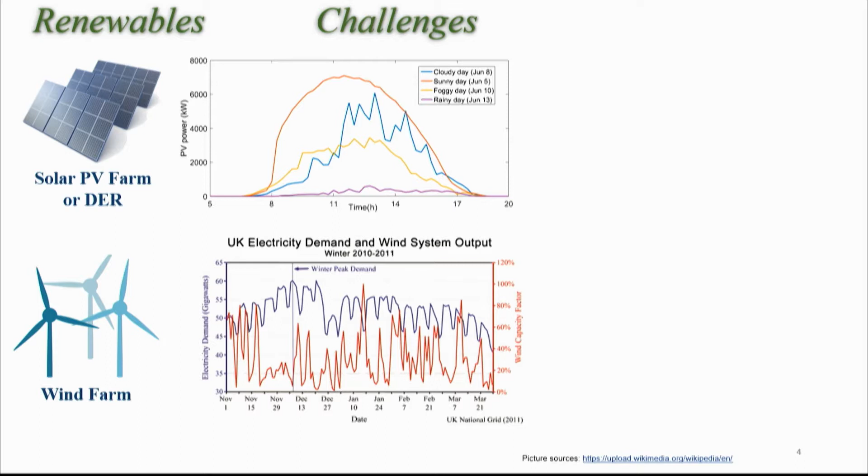So obviously we need a storage system, like a battery, to shift the energy from when it's available, more than what we need, to where we need it.

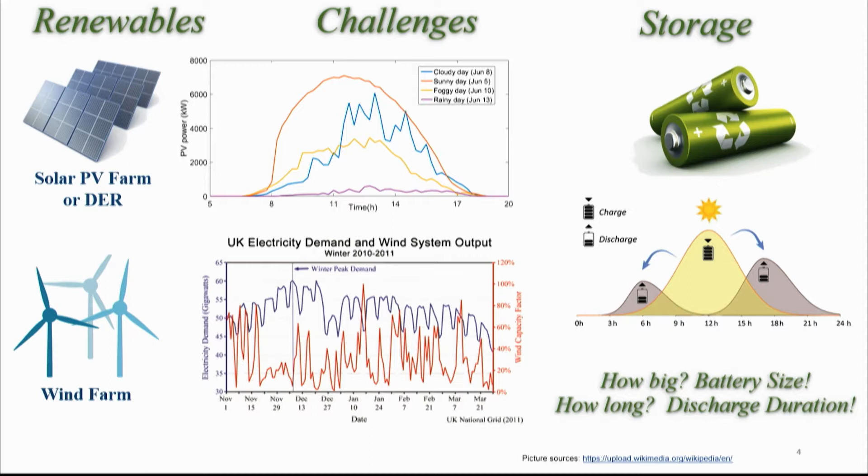But the question is, we are talking about economy and economy of scale, so how big should those batteries be? The size of the batteries, the cost of the batteries, and how long we can keep the energy in the batteries - we call it the discharge duration. Batteries can do the job up to a certain percentage of penetration into the existing energy systems. After that, you'll pay much more cost for every 1% increase than probably the first 50%.

Now, we have hydrogen, which is the most abundant element in the universe. We are made of carbon and hydrogen, almost everything. The problem is we cannot find it in a pure form on Earth. So we need to put some energy to produce the hydrogen, and that means hydrogen is an energy carrier, not an energy source. So we put some energy in, and we store it in that hydrogen. Hydrogen is just a very simple and light element - one electron, one proton, colorless, odorless, but very flammable gas. The atomic weight is around 1.008.

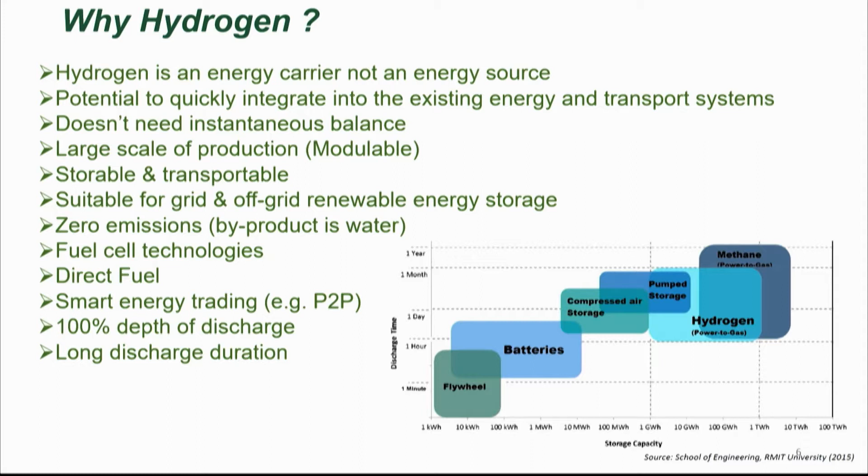And if we compare that to the flywheels or the batteries, compressed air, even pumped storage, hydrogen can go much bigger and can last for longer, so longer discharge duration. And you can also discharge to 100% depth of discharge, not like the batteries, where you cannot consume what's in there. And one more important thing is, batteries, when they are full, you cannot do much. But with hydrogen, you can store that hydrogen or convert it to another form of energy storage, like convert that to ammonia, or you just add tanks and store it. We'll talk about this later on. So that's why we are heading towards hydrogen.

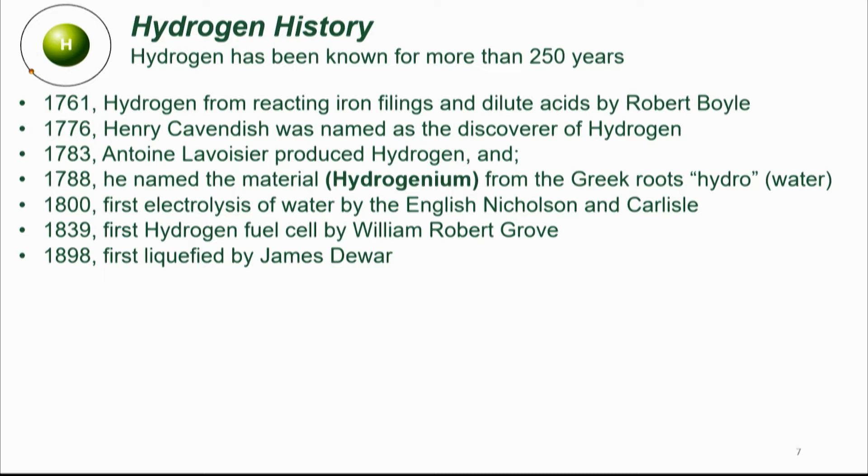Just to give you a quick idea, hydrogen has been well known for the last 250 years. The first time was 1761, though like 15 years later, someone else, Henry Cavendish, was named the discoverer of hydrogen, 15 years after the first one, Robert Boyle. Then hydrogen started gaining potential, and they began producing hydrogen after that. The first time hydrogen was named, given the name hydrogenium from the Greek root hydro, was in 1788. A few years later, the first water electrolysis was tested, and about 40 years later, the first fuel cell was actually built and tested. Then another 40 or 50 years, hydrogen was liquefied for the first time, and just about in the 1900s, that was the first time they used hydrogen in big balloons. And between 1920 and 1930, there were a lot of airships crossing the Atlantic carrying passengers, filled with hydrogen.

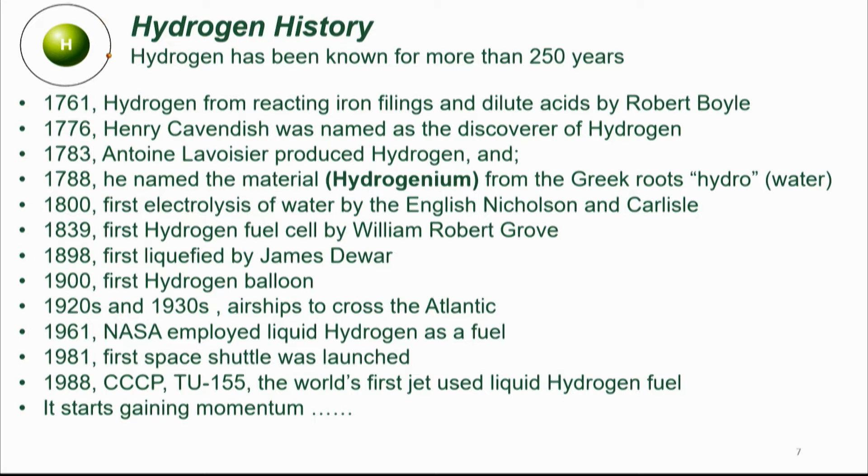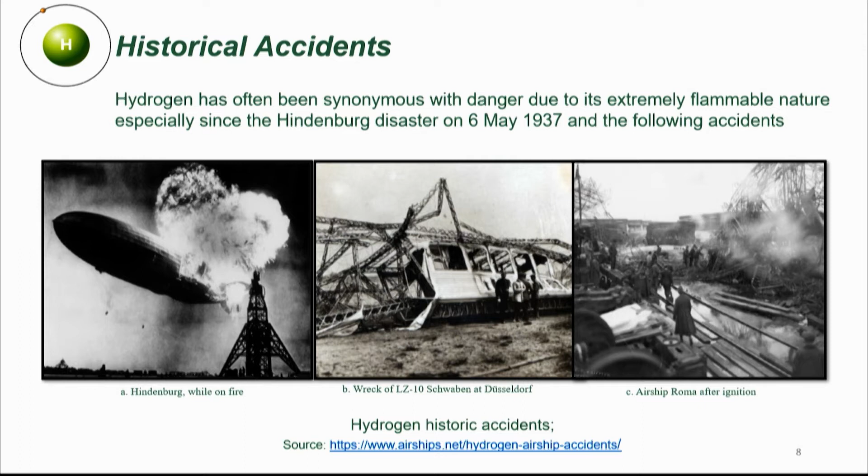Well, every time you mention hydrogen, people always remember the Hindenburg, which happened in 1937. It was a disaster. Though hydrogen was not blamed for this, but even further, if you mention hydrogen, some people think about the hydrogen bomb. And it's completely not related.

So accidents happened and delayed a bit the deployment of hydrogen in the energy sector. But how safe is hydrogen? Hydrogen is, first of all, non-toxic, which is a good thing. It's much lighter than air, so it dissipates so quickly. If an accident happens, if there's an open space above, the hydrogen will go so quickly and burn at once instead of spilling over the place and taking the fire around the area. So it's kind of much safer compared even to LPG. If an accident in a car carrying LPG happened, it would spread fire to all the cars and things around it. But with hydrogen, you hear a loud bang, but actually not more than that.

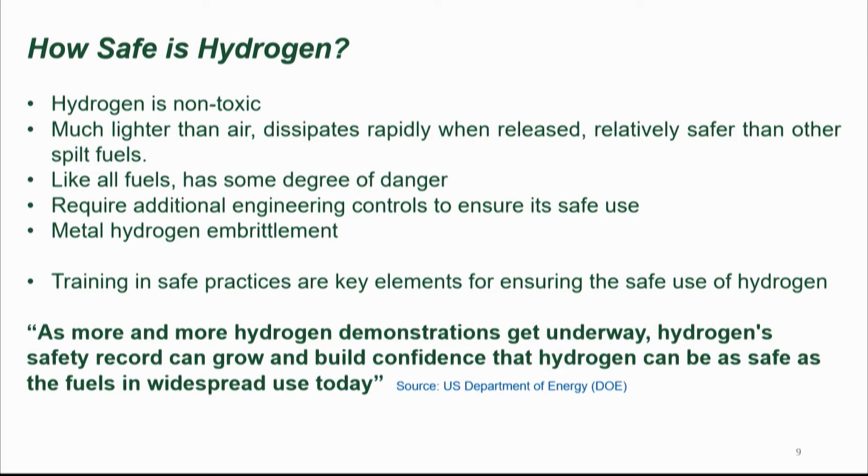That's it. So comparably, it's a fuel and has some sort of danger with it, like all other fuels. There are some special engineering controls required, especially for metal embrittlement from the hydrogen. So we are learning more and more, and quickly these days, to overcome all these challenges. So the more hydrogen demonstrations get underway, the more we know about how to deal with it safely.

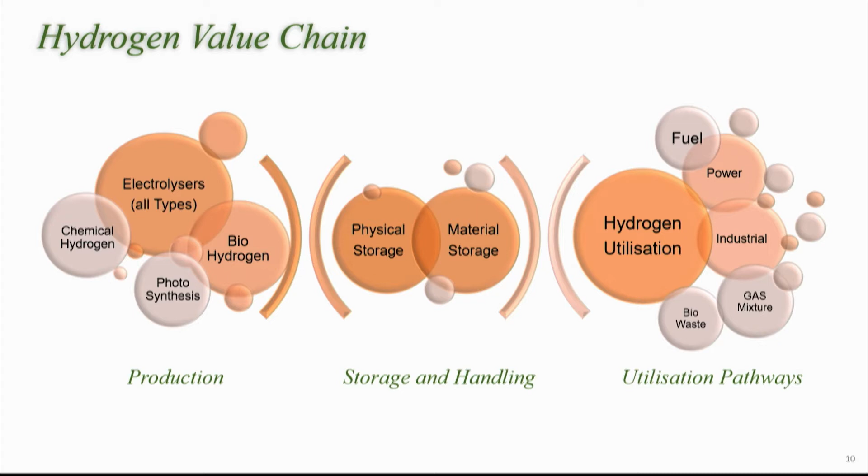To have a quick idea about the hydrogen value chain, it's basically three parts. One of them is when you produce the hydrogen, which could be through so many different pathways and so many different types of energy you can apply to produce hydrogen. And then once you have the hydrogen, you have to think about how you're going to store it. Then the hydrogen can be utilized in so many different ways, like direct fuel, generate heat, generate power, as a chemical raw material in refineries, even dealing with bio-waste, etc. We'll talk about this a bit more.

Now, as we mentioned, because hydrogen is an energy carrier, despite that, when you utilize the hydrogen, when you use it, there's no emissions. The byproduct is just water. You burn it or oxidize it, and it will be just water. But we have to think about the energy already used to produce the hydrogen.

So if you are producing the hydrogen using fossil fuel energy, then that hydrogen is actually carrying that pollution with it indirectly. Well, when you use it, it's zero emissions.

There are about three main types, but there are so many others. One of them is if we produce the hydrogen from fossil fuel, we call it gray hydrogen. This represents 95% of the existing market, around 80 million tons per year. This hydrogen is mainly used as a chemical raw material to produce fertilizers, ammonia fertilizers, and in refineries.

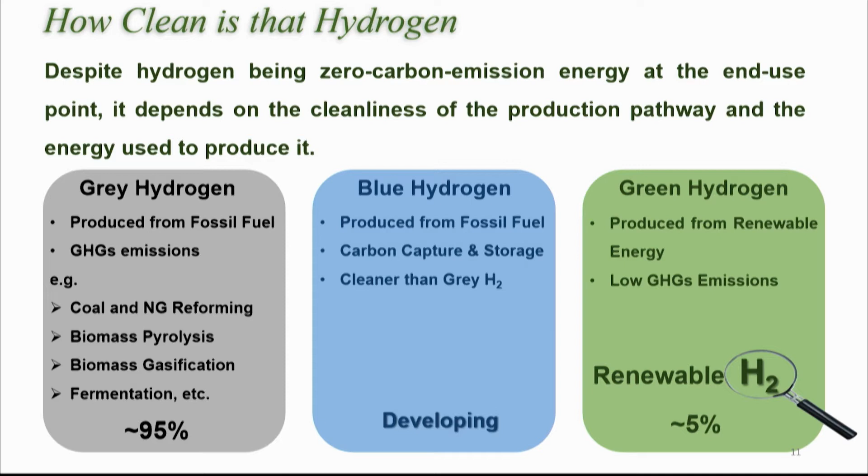And so many other things. Nowadays we're developing technology to capture the carbon of this process. If we capture the carbon and store it or utilize it, we call it blue hydrogen. But if we use pure renewable energy via water electrolysis, we call it green hydrogen, which nowadays represents about 5% or more.

To give you an idea about those pathways: energy could be electric, photo energy, biological, chemical, or heat. This energy is applied to hydrogen-containing materials, like water or any hydrocarbons, using a certain technology. In the presence of a catalyst, then you get the hydrogen.

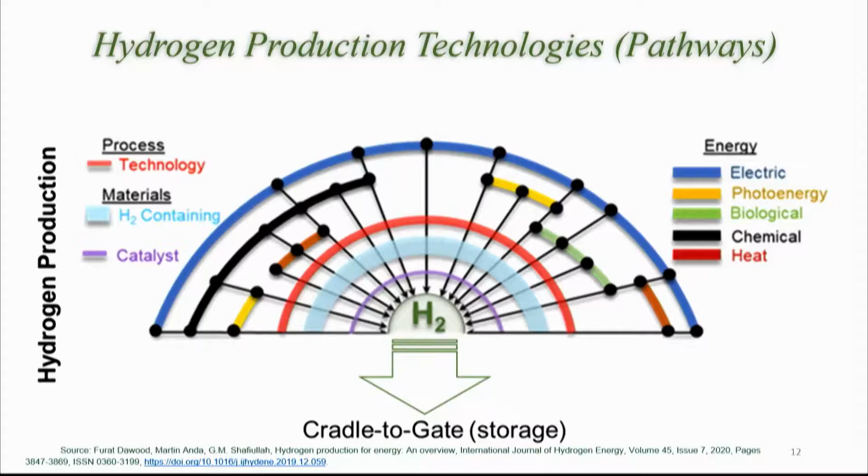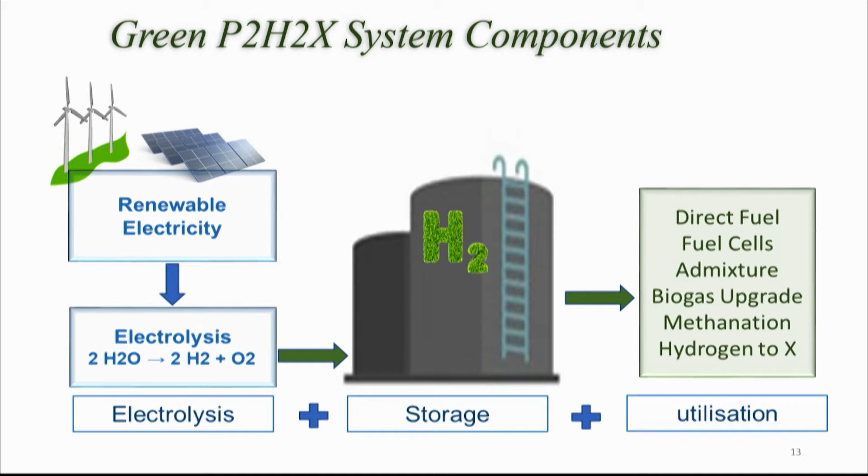So as we said, we're going to focus now on renewable hydrogen. So renewable electricity via electrolysis, then storage, then utilization. To have a quick overview of water electrolysis: it's when you apply a DC current into the water via two electrodes in the presence of catalysts, then the water splits into oxygen and hydrogen.

You get double the amount of moles from the water as hydrogen compared to oxygen. There are three main types of electrolysis: alkaline electrolysis, proton exchange membrane, and solid oxide electrolyzers. They are a bit different in the technology itself. If we have time, we'll go a bit more into that.

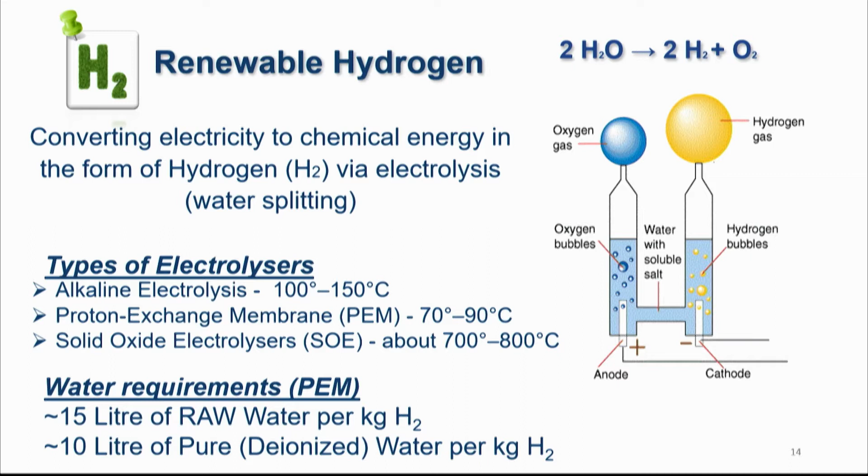To give you an idea how much water we need: if we're using a PEM electrolyzer, we need about 15 liters of raw water per 1 kilogram of hydrogen. If it's pure deionized water, it's about 10 liters per kilogram of hydrogen. To give you an idea, 1 kilogram of hydrogen can store 33 to 39 kilowatt hours.

Which is enough for 2 houses for 24 hours. You need just 10 liters, so it's not much water. And you can claim, if you use it through a fuel cell, you can reclaim some of that water actually. You can reclaim 100% at a very advanced stage, so you probably won't need that much water.

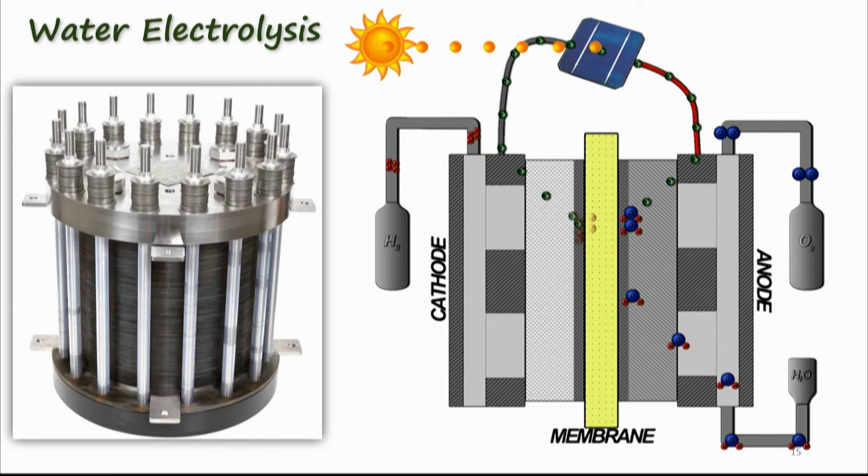This is how it works: you put the DC current, then through the membrane, the water will split into oxygen and hydrogen. It depends on which ion crosses the membrane—whether it's the oxygen, the hydrogen, or the hydroxide, like OH—that determines the type of electrolysis.

Now storage. Storage is kind of another challenge. Hydrogen can be stored in a physical-based system like compressed gas or liquefied—you liquefy that gas to liquid hydrogen, cooling it down with compression. You can also use underground storage, like depleted salt caverns or depleted gas fields, to store hydrogen there. Or you can store it as compressed gas using those cylinders or bottles.

The new technology is developing so quickly. It's a material-based type of storage, so we use absorbing or adsorbing materials—like a sponge that absorbs some of the hydrogen. Those ones are actually gaining momentum now; we call it solid state type of storage. And probably metal hydrides are the most advanced one these days.

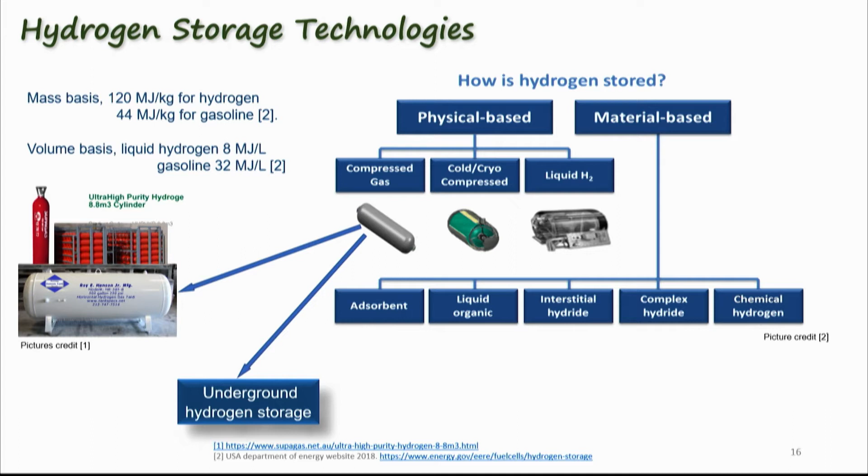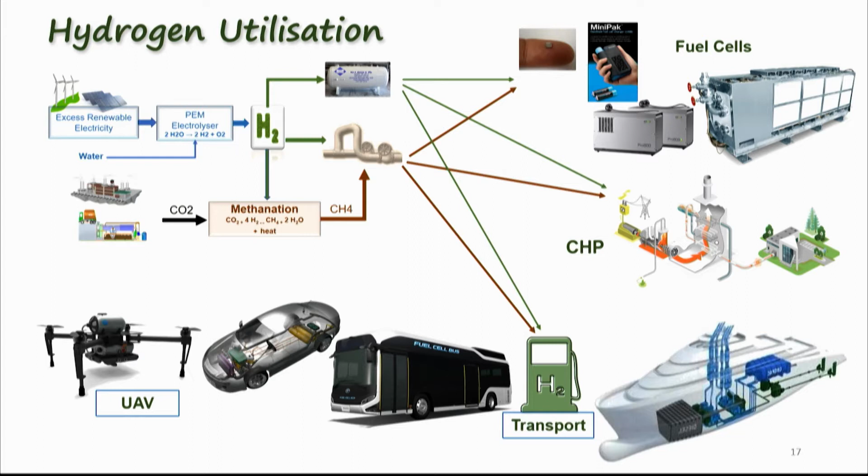Utilization: once you have the hydrogen, you can use it in fuel cells to generate electricity, or use it in gas turbines as pure hydrogen or blended with some natural gas, or you can use it as a direct fuel for so many different types of energy needs.

This is how it works. It's like a hydrogen battery. So you store it here, and you can then generate some electricity when you store the hydrogen, when you have the sun there, or when renewable energy exists.

And also you can blend some of it with the gas. We call it town gas. Town gas is not a new thing. Probably up to the 70s, 71, we were using town gas, which is between 60 to 80% hydrogen, extracted from coal. We were using this down in Fremantle and Perth until the discovery or extraction of natural gas. So we were using that long before natural gas.

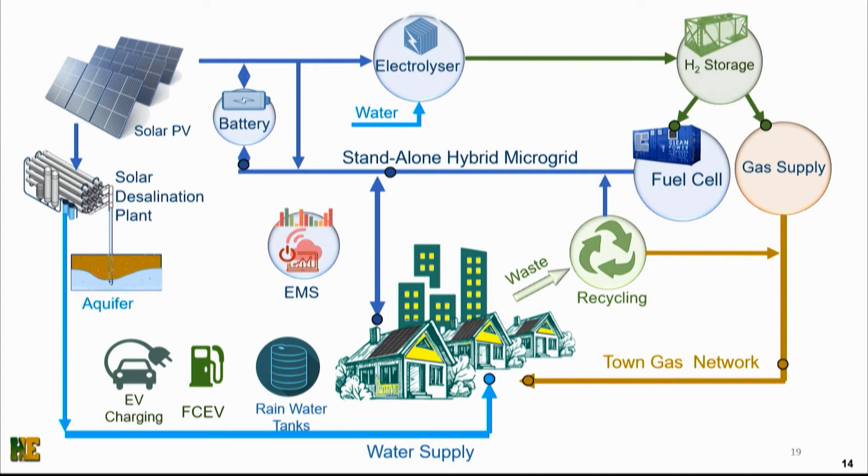During the night, it's going to work. The battery can supply a bit, and the hydrogen will be like a base load generator. So the battery there is to respond to any fluctuations or quick demands. And because you have hydrogen, you can have a fueling station, a hydrogen fueling station as a fuel. You can supply it as a gas.

So a hydrogen economy was first introduced in the beginning of the 1970s by John Bockris. He was an engineer who worked for General Motors, and he coined the term hydrogen economy. And since that day, people started thinking about where we can use hydrogen.

Can we use it in agriculture, making ammonia and fertilizers, green steel, green coal, lithium batteries, manufacturing, all sorts of industries.

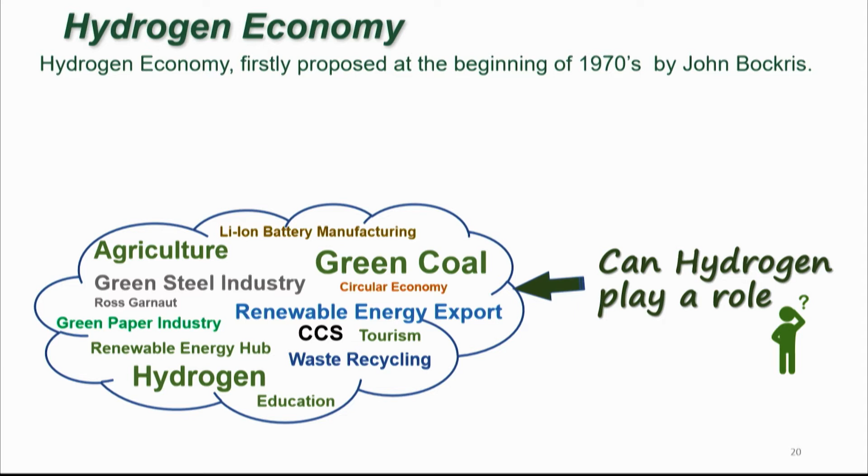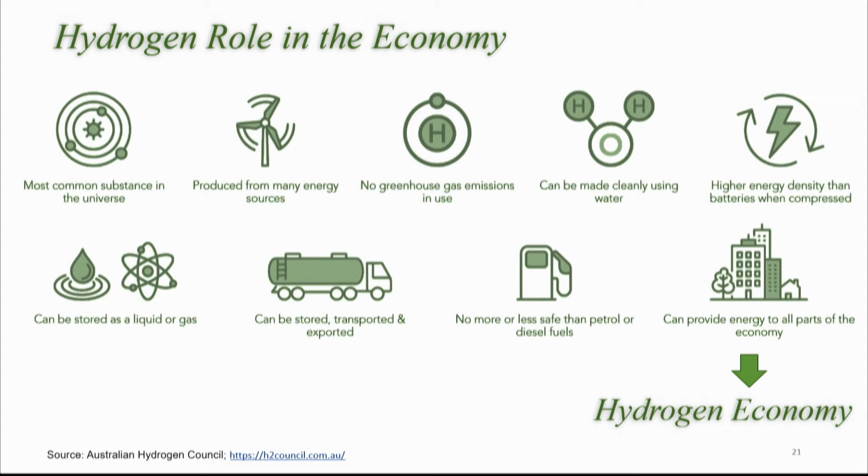This is actually a picture from the Australian Hydrogen Council from last year, and it shows that hydrogen can provide energy to all parts of the economy, and that's why we call it the hydrogen economy.

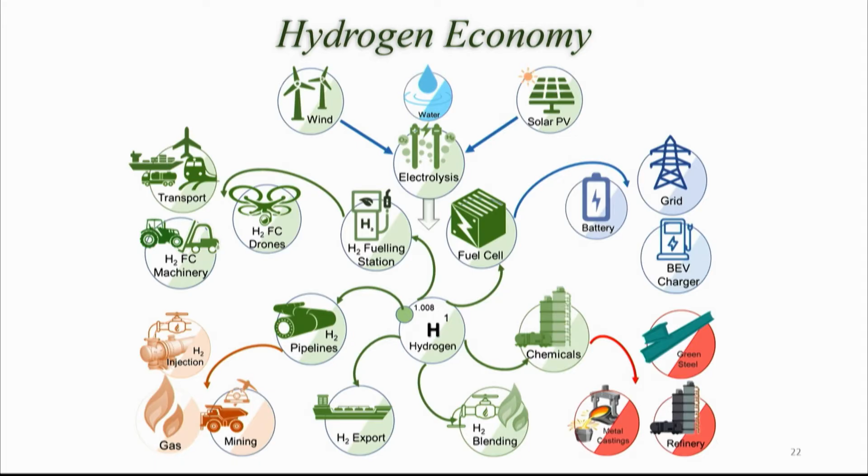We can use it in industry everywhere. We can blend a percentage of it with natural gas. Nowadays, we are talking about 10 to 20% maximum. You don't need to modify anything, you just blend some of the hydrogen with the existing gas pipelines. And you can imagine how long those gas pipelines are. So there's a possibility to store a lot of energy in the form of hydrogen in those gas pipelines without the need to modify anything.

So what happened in the last 2 years in Australia that started gaining momentum so quickly? Well, work around hydrogen goes back about 20 years in Australia, and the first time they mentioned and tested hydrogen was about 45 years ago in Victoria. But in the last 2 years, a lot of work was done, and the first Renewable Hydrogen Conference happened here in Perth in August 2018, and that's when it started gaining momentum.

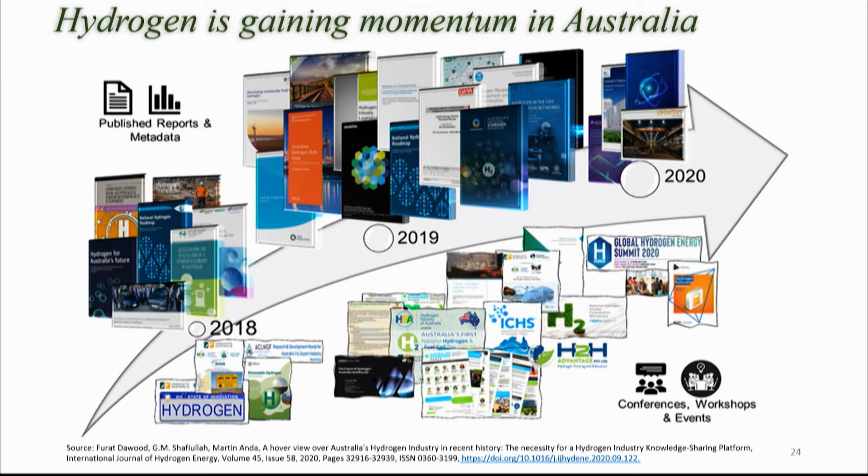Between 2018 and 2020, there were a lot of reports, supporting documents, studies and research, and events, until last year, September, when they issued the Hydrogen Strategy for Australia by CSIRO. That was the 10th of September 2019.

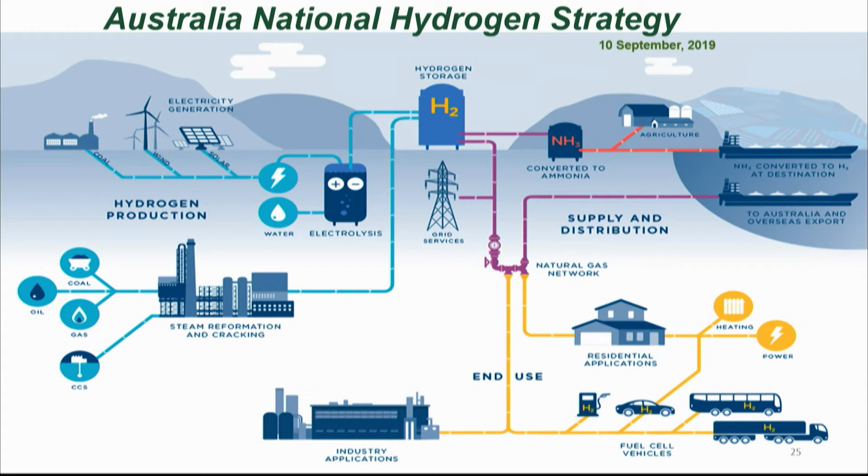And in this picture here, they show what we said before, that once you store hydrogen, you can produce ammonia, then this will go to agriculture, or you can export ammonia. You can use it to blend with natural gas and use it as a fuel, or use it to generate electricity. So this is kind of a bigger picture for hydrogen's role in the economy.

And they started talking about how Australia can play a big role and become a superpower by exporting renewable hydrogen. When you export renewable hydrogen, you are storing the renewable energy, so we are exporting renewable energy to the world. We can really be a superpower, a big exporter of renewable energy and renewable hydrogen.

Just this year, the government moved to the phase of commercial scale. In March 2020, ARENA announced $70 million for commercial scale plants to produce renewable hydrogen. And just after that, in May 2020, the Clean Energy Finance Corporation announced $300 million.

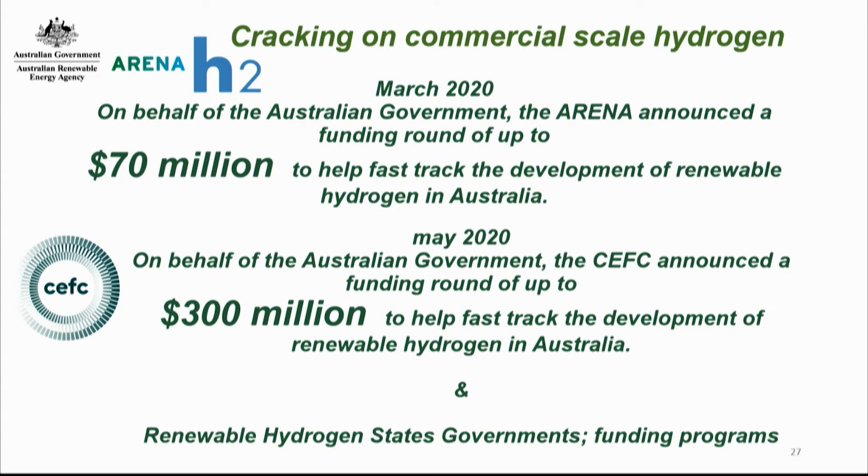And since that date, actually about 10 more times, funding programs and new projects came to the media, and they announced a lot happening. Just recently, a few weeks ago, the WA government also announced about $20 million to put in some demonstration plants.

Now there are two challenges still needing to be resolved. One of them is how are we going to certify the hydrogen, how clean is that hydrogen? So the current certification scheme, which is the only one around the world, is based in Europe and belongs to Hydrogen Europe. In this scheme, they use color coding: green, blue, gray. If it's from coal, it's brown. If it's from nuclear energy, they call it yellow. These sorts of things.

Yeah, but what I'm doing in my PhD is trying to develop a new hydrogen certification scheme, because I think this color coding is not telling the full story, and it's not going to work. I'll give you an example.

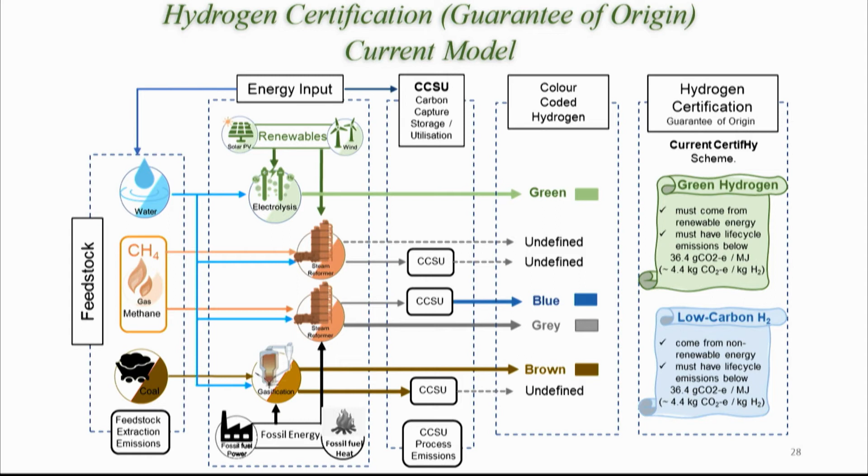So the only scheme is they came up with a threshold of 4.4 kilograms of carbon dioxide equivalent for each kilogram of hydrogen. If it's from renewable sources, they call that green hydrogen. If it's not, they call it low carbon hydrogen.

The right way to do it is we should be technology neutral. So we don't care which technology or material you have used. We care about how much pollution was associated with each kilogram of hydrogen.

So the proposed model is to aggregate all the pollution or carbon dioxide emissions associated with the materials themselves, like these hydrogen-containing materials, even water. We should care where we get the water from and how we desalinate it. Are we using a coal-fired power plant to power that desalination plant, or renewable energy? So all the carbon emissions here, combined with all the carbon emissions of the process itself as a technology.

Even when we say we capture that carbon and store it, we're going to use some energy there. We should care about what sort of energy that is and how much carbon dioxide was associated with it.

Then we are suggesting using hydrogen as a green energy because it's zero emission when you use it. But how many green stars are there? So up to 5 kilograms, probably we can consider it green. So green stars. When we say 4.4, if you have zero emissions, absolutely zero, then 5 stars, full 5 stars.

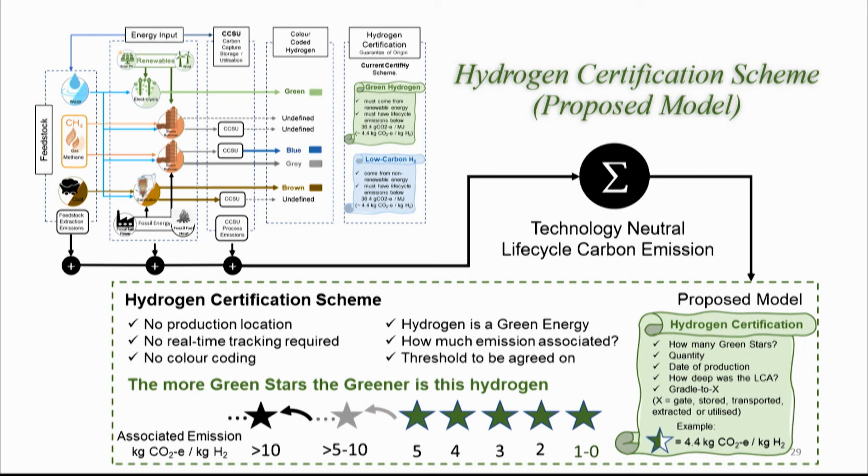Domestic users also need to know this — remember, if you buy an electric car and charge it from a coal-fired power plant, there's no point, actually. You're just doing the pollution somewhere else. So we need to certify it. Otherwise, we won't be able to sell it.

The other main challenge is: should we start the infrastructure first, or create the market, the offtake, first? I'll give you a very quick example.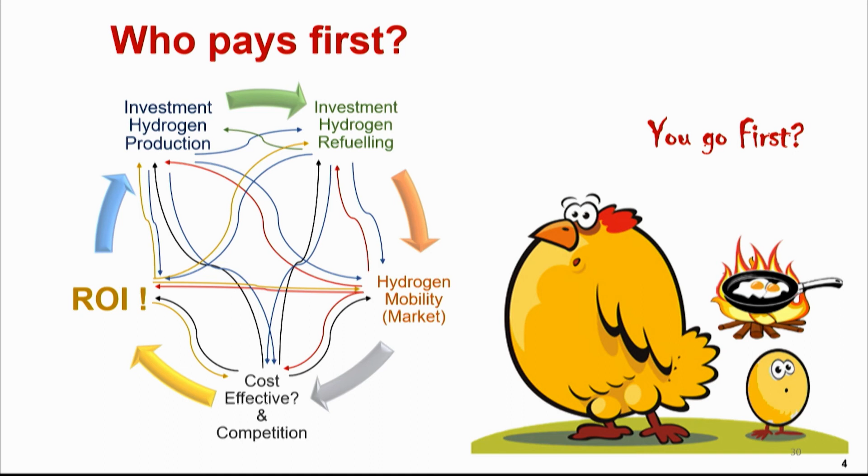If you put hydrogen fueling stations along, say, one of the highways, but there are no hydrogen cars, what are you going to do with that hydrogen? Who's going to invest his money in this? If you import some cars and there's no infrastructure, no fueling station, who's going to buy those cars?

So it's very important to start the infrastructure and the market in parallel, simultaneously. Otherwise, we will not be able to take off. It's happening around the world. We are just behind because no one is taking that first step here. Infrastructure should probably start first, but they should come together.